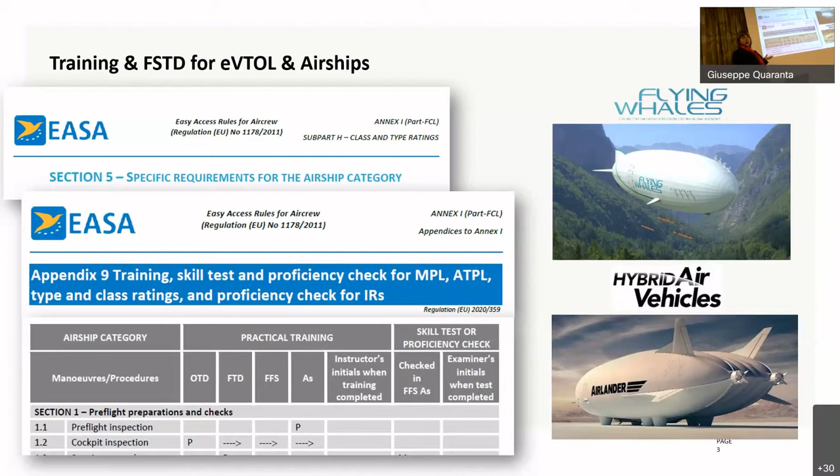So when we say we need to train pilots on the task, we want to start talking about what is available for training. And when we look at the big machine on the right side, the airship, there is already something in FCL with respect to training. So there is a type rating process for airships.

But as far as VTOL is concerned, there is nothing yet. It's too new. So we have no aircrew, there is no type rating section, nor any Appendix 9 in the FCL. So the question is how to tackle pilot training pending the result of the ongoing rulemaking task 0230.

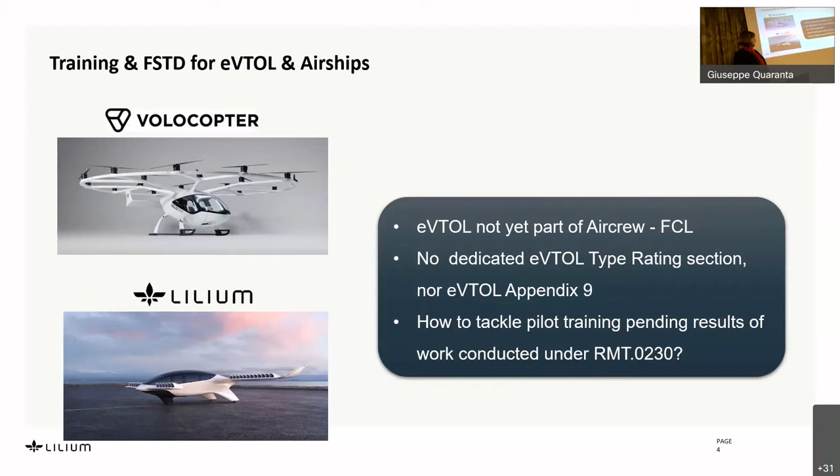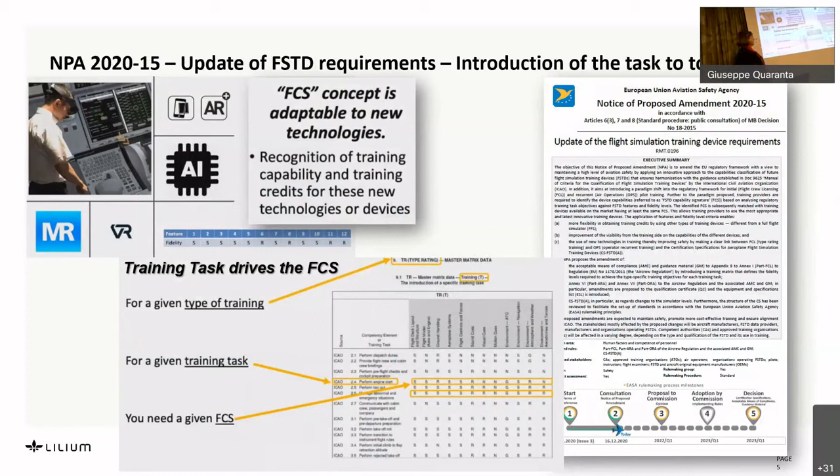One of the ideas is to use the latest publication from EASA, the NPA 2020-15. I think you already got a good lesson on FCS from Eric, so I'm not going to expand on that, but really, that's where we are going to start.

So if we look at how we could do that in terms of training development, the suggested methodology we are contemplating for the new technology aircraft, let's put it this way, is to build upon what is existing, meaning the current Appendix 9. So we built a big matrix, for example, where we list everything from the current Appendix 9.

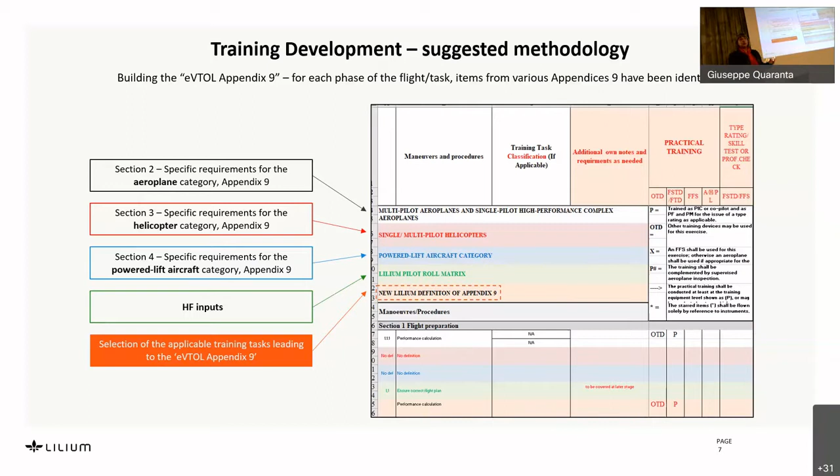We are also, during the certification process and the internal development process, considering human factor inputs, so we take them into account. And at the end of the day, we select what is going to be the applicable training task leading to the potential eVTOL Appendix 9. So that's the training side of it.

Now, what do we do with the FCS? So we take the NPA and we have reference for the airplane, for the section related to Appendix 9 airplane. For helicopter, currently, the reference is Doc 9625. Yes, thank you, I always mix up the number. But that's where you can find the reference.

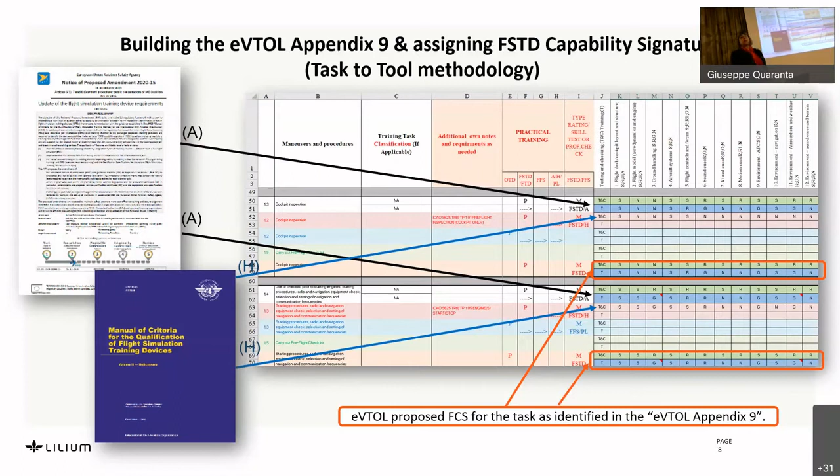At the end of the day, you have to make your own mind for eVTOL, or eventually for airship if you want to apply the same methodology, about what's going to be the proposed FCS for the task. And here we talk about the eVTOL Appendix 9. So the airship people are also considering applying the same methodology, but bringing their current approach into the same FCS analysis.

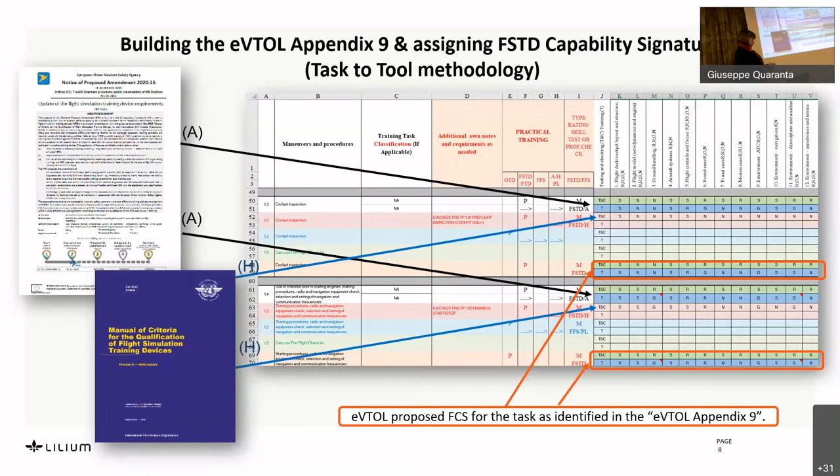So once you have decided about that, I would like to show you two points that I believe, based on the Lilium design, as an example. We have been talking a lot about visual cue and motion vibration cue. So on the Lilium, you might have seen the photo at the start. You have what we call a canard, and you also have floor/chin windows.

And when you want complete fidelity of the pilot visual environment, the traditional dome is not necessarily going to make it. So the VR/MR solution really looks great for this kind of design.

Remember that we are going to take off vertically and land vertically, so it's the safety critical phase of flight where those canards, mainly on the Lilium, have flaps with engine that moves. The pilot needs to see that because he's going to know where he's going to be in his liftoff. So those two are really safety related.

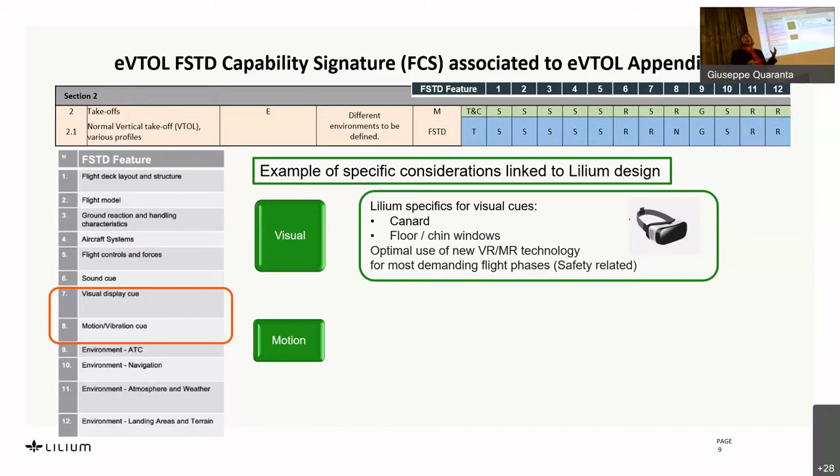For the motion side, where I already commented on the motion this morning, again we think critical takeoff and landing in crosswind condition, or when the machine would fly between buildings. So the idea is that from what we have identified so far, we believe a representativity, not full specific motion,

could be good enough. Because what you have to bear in mind on those new devices, we are not going to go zero flight time training like the big airlines. So it's going to be a blend, most probably, of in-aircraft and synthetic training. So if you have an extremely good visual with VR where you can have your full immersive environment coupled with a good representation in terms of the motion system, I think this will make the job. That's where the thinking is currently.

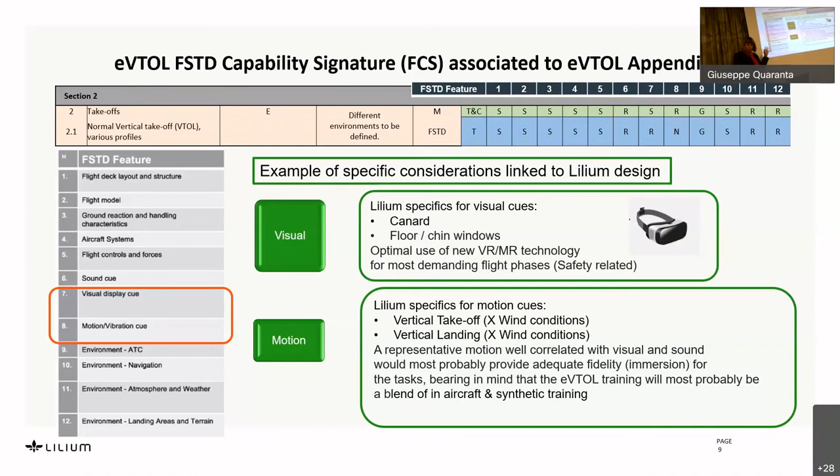So now we've talked about the analysis, the assignment of the FCS. In training development, you also have to consider what is coming from the aircraft manufacturer side, the OSD. But when it's a brand new aircraft, in fact, you do all that together at once.

From the training, you have now the selection of the FSTD that you are going to do based on the FCS that you have identified here. Once you have specified what kind of device you want, you need to qualify it.

And that's where comes the next step, where again here we are having some kind of issue, because as you see, there is no CS. So the only path currently is to use the special condition process, using as well the simulator validation data from the manufacturer.

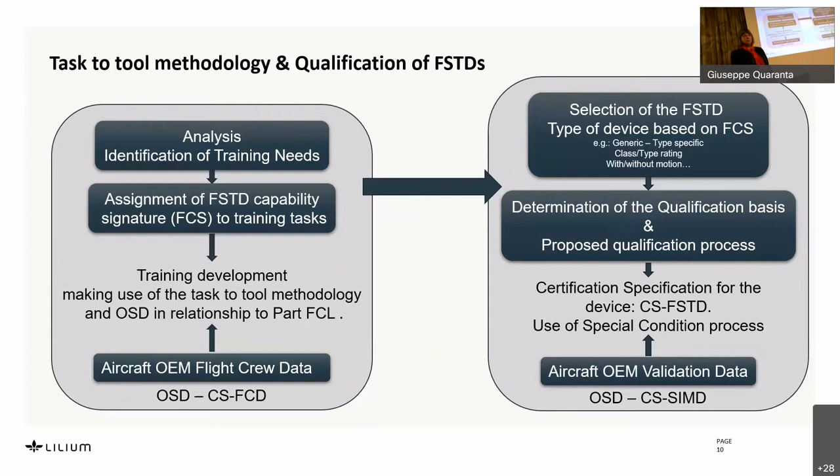So again, in the same presentation I mentioned before, you have the two key points from Dan Lucy that I fully support for why we need to use special conditions. Only known solution to integrate the new technology in FSTD regulation. eVTOL are not covered, we need to find a way. Airships are not covered, we need to find a way. But that is linked to the aircraft.

The other point is innovative technology for FSTD like VR, MR. So really, the special condition is the path to allow new technology, like for example with the VR for VR motion, being able to qualify and get training credit, but also for new aircraft technology to be able to cover, and we cannot apply the traditional tests that are currently published either in CS FSTD Alpha or helicopter.

So we've been tasked, so all of Volocopter, Lilium, Hybrid Air Vehicles and Flying Whales, to work together and find a solution. Because, as I mentioned, there is nothing to support, and we need that. We will have to find a way forward if we can find a compromise altogether, but most probably at the end of the day, because of the specifics of each product, we will end up with a specific special condition for each of us. So how did we manage?

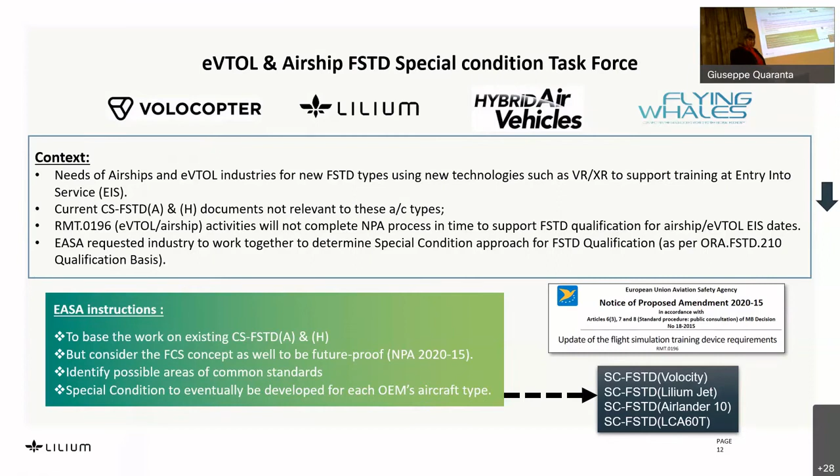These special conditions, this is just the reference of the text, but what I want to point out is that we can use CS FSTD A or H. You have to use OSD, or you go to the special condition.

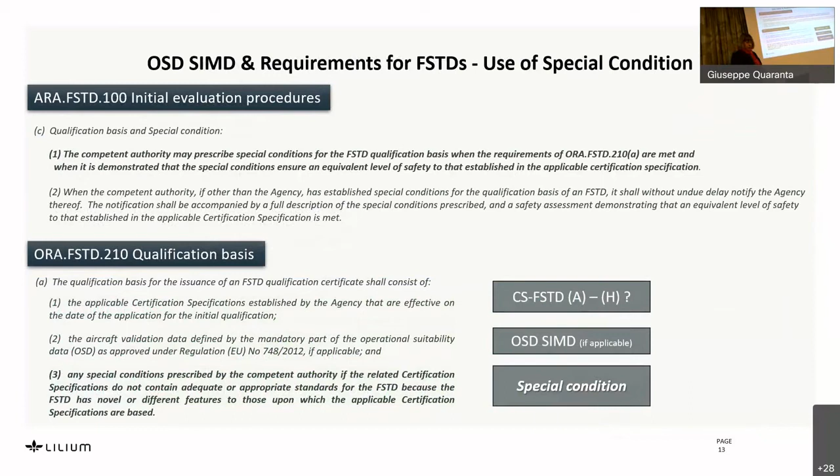Let me try to guide you to the special condition path approach and how we see it and how we are going to propose a solution to EASA. So you have a new aircraft type, whether it's an airship, an eVTOL, or eventually this could be used later on for any kind of aircraft type.

Is the current CS FSTD airplane available and applicable? Yes, it is available.

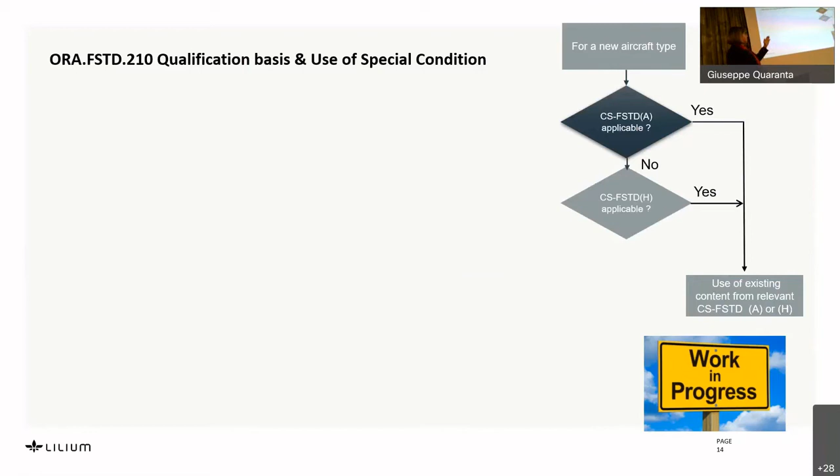If it is applicable, then you would use what is in there. For the helicopter, if it's not applicable, you have to go for the helicopter. If you are a rotorcraft, that's for sure you are going to use this one. And then, if the answer is no, that's where the story of the special condition starts.

So for the special condition, you could consider that maybe some of the requirements of the current available CS-FSTD are applied. It may be a mix, for example, of helicopter or airplane. And if some of them are applicable, the next question would be the tolerances, for example, of the test that you have selected, whether it's from airplane or helicopter. Are those tolerances valid for your aircraft? They may be, and if they are, then you use the selected elements

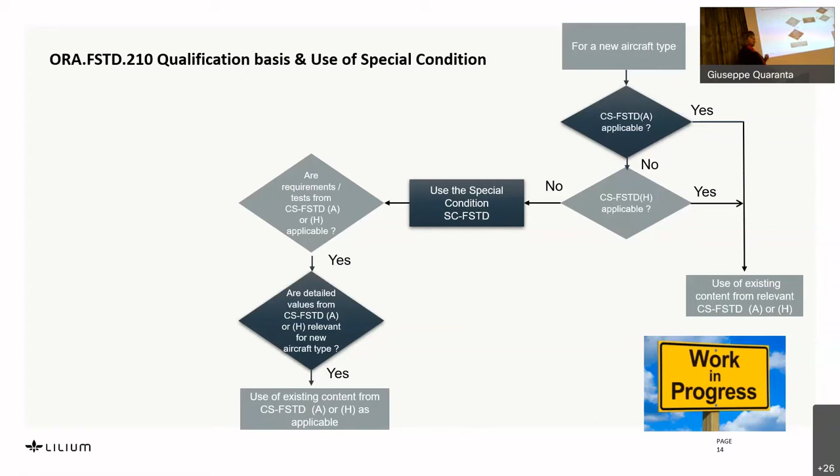directly with the tolerances. If the requirement does not exist for your product, then you have to build something for it. And then you would have to justify and provide a rationale, and it has to come with support from the manufacturer, because only the manufacturer knows the product. If you have a test that fits, but only the tolerance part cannot work for your aircraft, then you can propose something new in terms of the tolerances that match the behavior of your aircraft, but again, you have to justify. And everything that you propose has to be justified and, of course, agreed by the authority.

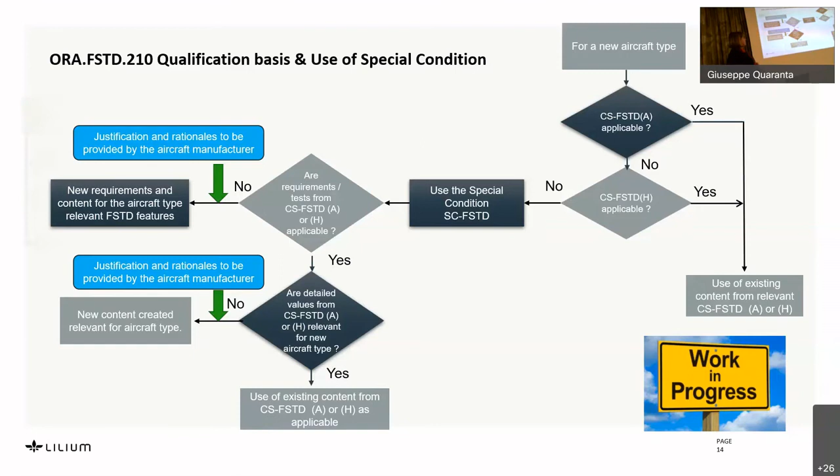So that's the principle of how we thought we could use and how we try to make it work, that we have used, in fact, the skeleton. We are going to propose a kind of a template, if you like. So you have a big list of everything, and you pick what is going to be applicable for you. And how do we do that?

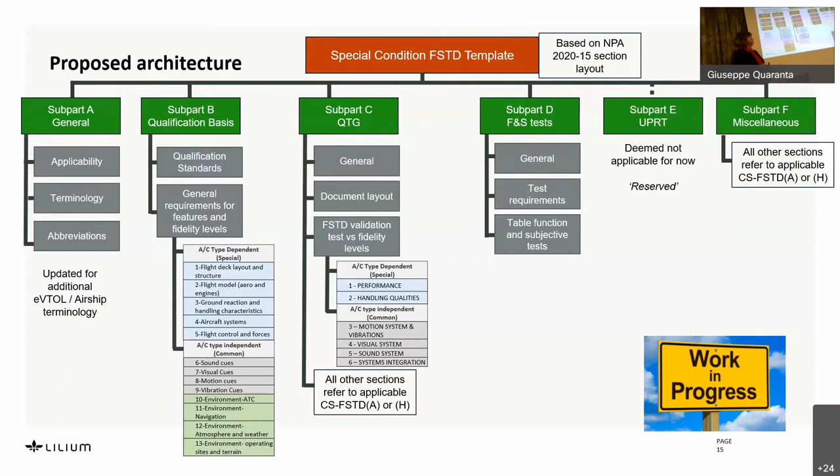But we believe that here maybe we can find a compromise that works for all, because we are talking about phases of flight. So we could put every phase of flight from helicopter, from aeroplane, and others. And if you have a new phase of flight, you would add on to it. So that's basically the idea.

If we come to this classification of features into special and common for the general requirements, the so-called subpart B. So what is called special is all that is related to the aircraft side. And for each of them, you would have to provide a statement of compliance for the type, class, or group of aircraft being simulated.

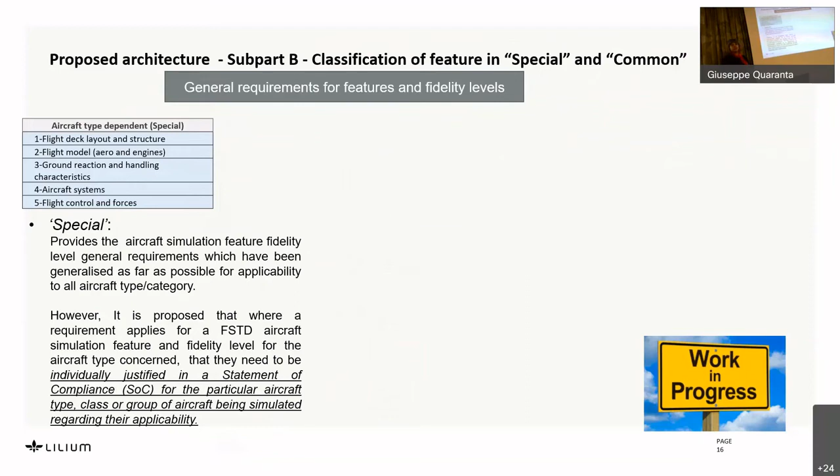What we call common are related to sound cues on one side and environment on the other. Cues, globally, let's put it this way, and environment. So in fact, to be sure that we cover every configuration, we have voluntarily kept the complete list from the helicopter side. But we have made different assignments for vibration cues and motion cues to keep some of the arrangements which were in the airplane only, where there was no notion of vibration. They now are moved into vibration, so it's a bit reorganized, if you like, but you would find everything adapted for this common skeleton.

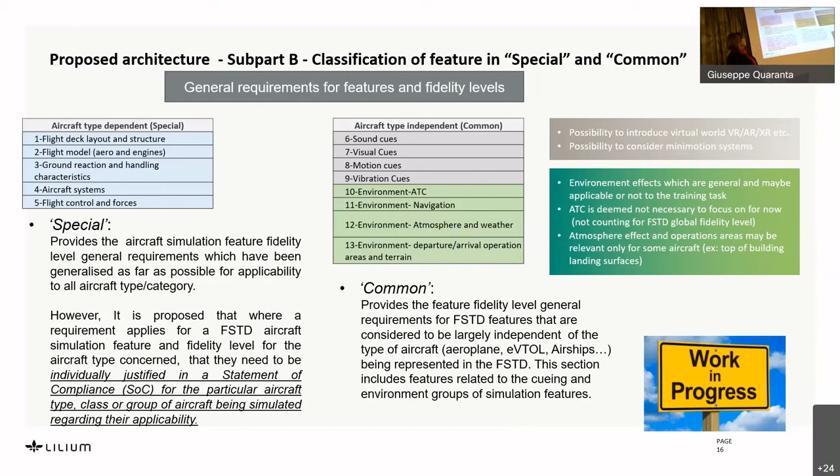And what is important is this allows, in fact, by building a special condition, to introduce the new technology for the visual side or for the environment, where you had a presentation from CE explaining that wind simulation between the buildings is going to be key. That is the kind of thing that we will have to look at slightly differently to what is looked at today. So the way it's set up, we'll have provisions. So you would have, in fact, a shopping list of the tests coming from Alpha and helicopters, plus a line that says other, where under other, you may bring the dedicated tests that would be required because of your specific environment, because of your specific aircraft design whatsoever. So that's where we stand right now.

For the QTG, or let's say subpart C part, the validation tests and fidelity, the same principle would apply. The idea is that you look at CS-FSTD(A). If it works, you pick this one. If it does not work, you look at H. It may work, you pick this one. If it does not work, you look at whether a combination of both would work. If it does not work, then you go for setting up your new test, which could be an output of the OSD process from the work with the manufacturer, or you propose new tests, which could be a result of this ongoing activity at the NPA level. That's where we stand at this point in time. And again, it will be split between aircraft dependent, special, and aircraft type independent, common.

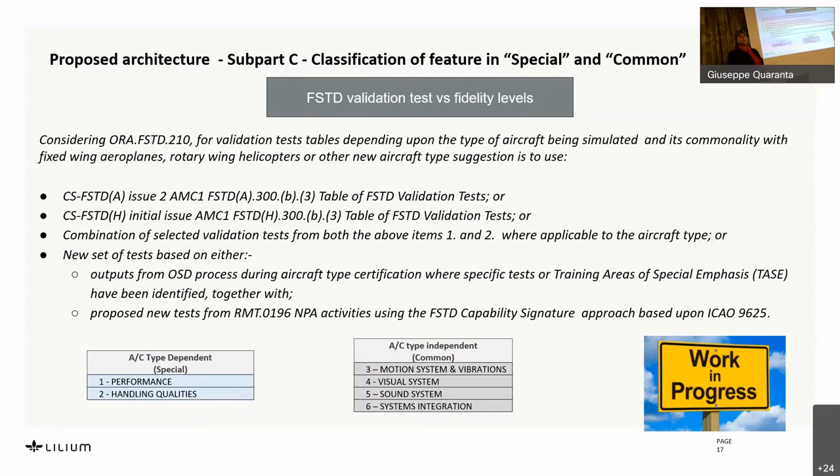So in conclusion, because I think it's late, we have to conclude the day. The message is work is ongoing. We are trying to find a kind of skeleton, a template that could be used by anyone. We have tried to make sure that the terminology can also be used by anyone. And we have defined it between common and special. And you would build your special condition for your need. Of course, it will require a lot of effort to discuss, negotiate, find the right solution with the authority. But it is the only interim solution we found until such a time that there will be sufficient knowledge about all that, so that perhaps there could be standard tests in a CS-FSTD.

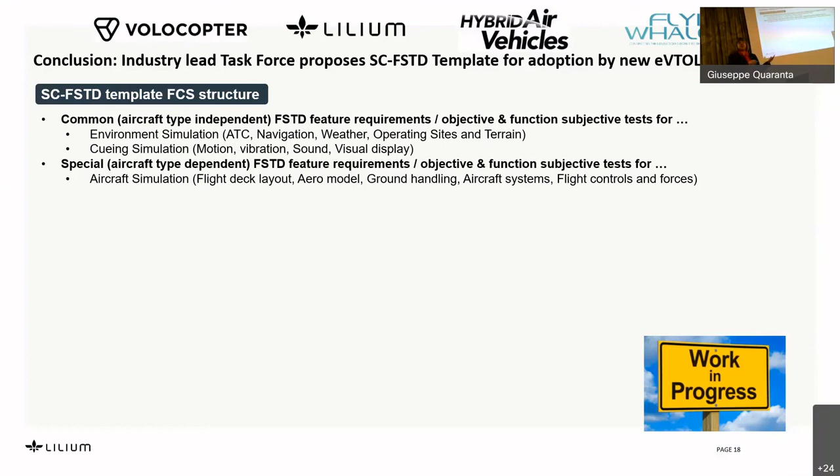Because to be honest, whether it's Volocopter, whether it's Lilium, you have heard that the target for entry into service is around 24, 25, 26, and it's not going to be ready. So we have to have a solution before that. That's why we have been enthusiastic working on it, because we need a solution. So hopefully what will happen is that each OEM will produce its own special condition in this time frame. And when there are a number of them available and more knowledge gained with certification on those new technology aircraft, most probably at some point in time, there will be a standard.